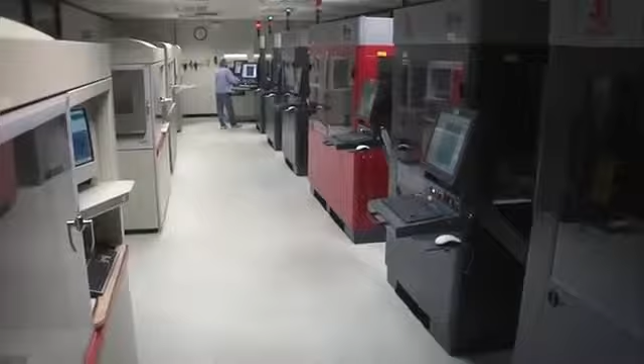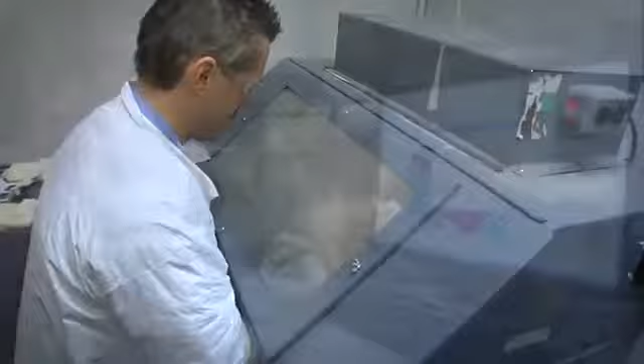This facility is operated by UAW 160 employees with some of the most competitive work rules in the corporation. These are very talented men and women, wood model makers, metal model makers, who basically operate these machines 24 hours a day, 7 days a week, 365 days a year.

These employees, these model makers, have taken their classic training and applied it to this new technology and come up with several innovations. In fact, some of the innovations that these men and women have created have become industry standards. Our technicians work so closely with 3D manufacturing people that it has helped them to modify their equipment or actually bring enhancements into the trades and in the industry.

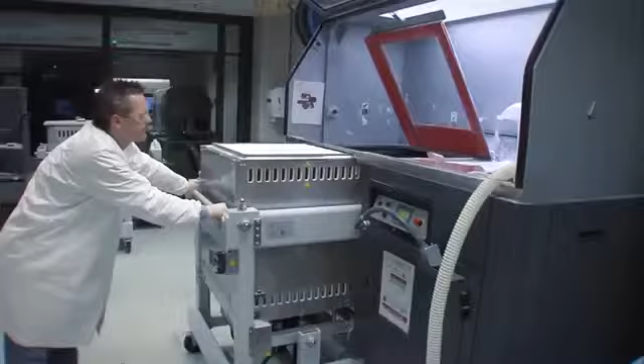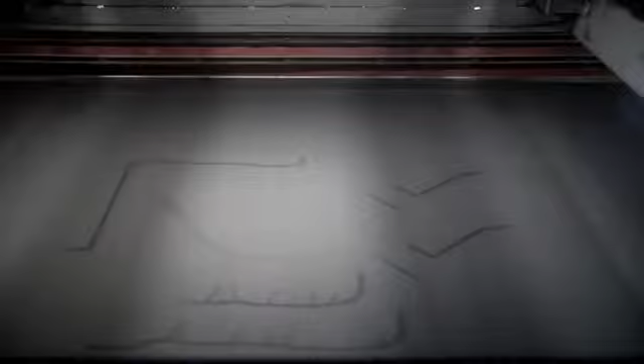Years ago, you would actually have to manually load those machines with this powder and mix those powders manually and then insert them. So they worked in conjunction with our folks to find automating ways of loading those machines. And then through looking to automate them, we also found out, well, what about recycling some of this older material? Instead of just using always virgin material, let's go ahead and mix a blend of reused material with new material. And they've actually developed a machine station that combines those in one.

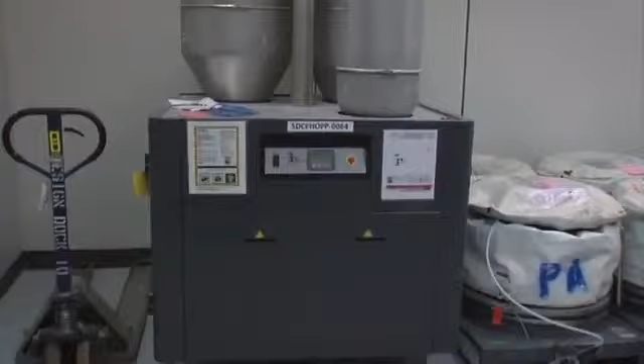To date, we calculate somewhere around 30% recycling benefit for us. And that again was with the collaboration of the local 160 skilled trades folks down here in this very lab. And they never stop amazing me on how they come up with better ways to do it.

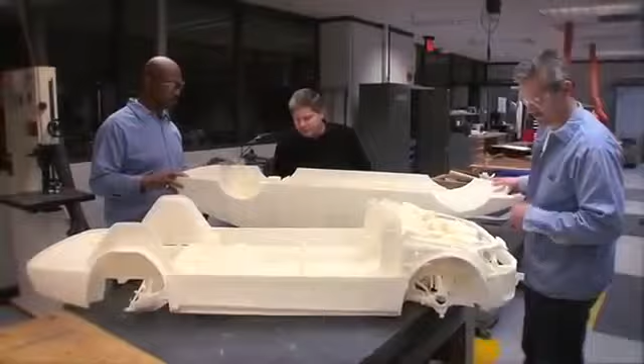I'm a wood model maker by trade. I've been in the RP lab for 15 years. The more I saw of it, I worked with it, and then I got into the department, and it just grew from there. It's unbelievable. And just seeing it advance, it's just great. I mean, things that we do now within a day or 2 days would take months to build by hand.

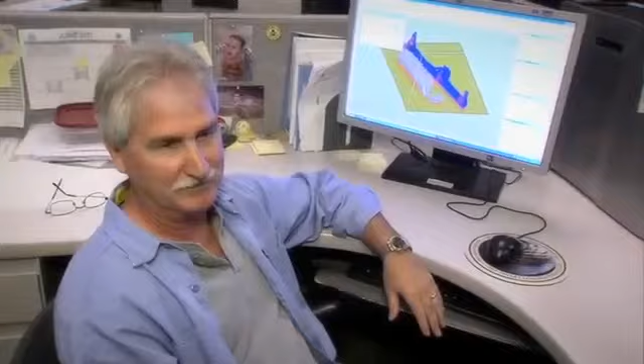We are really dedicated to what we're doing. That's the main thing. We all enjoy the work and we want to see a good product come out. And that's what our main goal is. And it's come a long way from when we started.

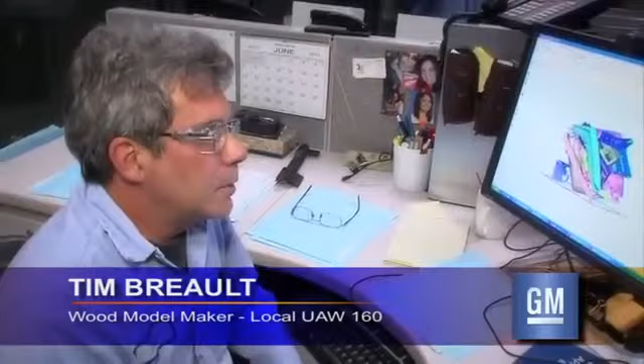I worked for GM for 27 years. I'm a wood model maker by trade. And I worked on the CNC machine prior to that, but it's just cutting up parts and manipulating parts, understanding how they work and function and whatnot.

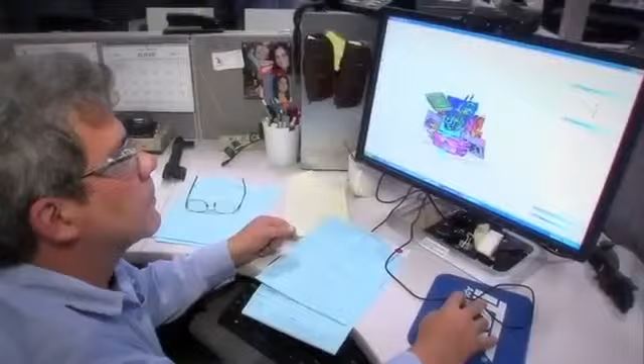So as the hot jobs come down, like this one here, I was able to quick cut it. I was able to put them on top of this show here, I call it a show. As you can see, these little windshield wipers, they needed them right away. So I was able to place them on top of a build. I never miss a beat and they just keep going.

Been a pleasure working here. We got a good group of people here. Enjoy it. So I got another 10 years or so.

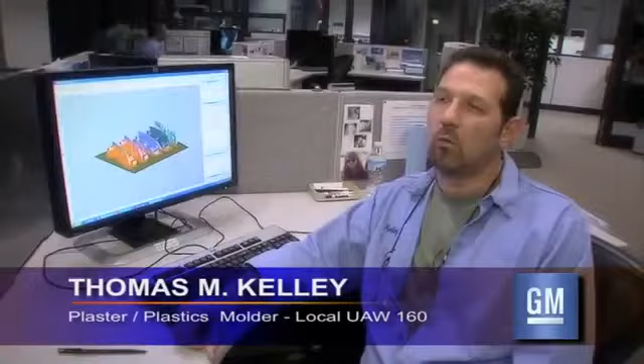I'm the newest person, one of the newest members here. I came in with 3 other people. Well, one of the appeals was because it was a small group. And also, I wanted to learn more about the computers and how to do these types of things. And I found it fascinating that you could take a laser and make a part out of it.

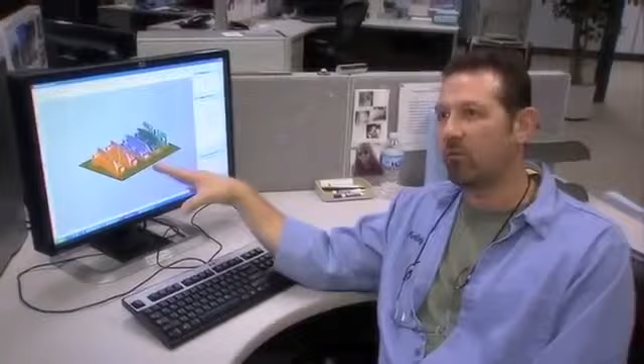Well, there's several ways that we use our creativity, you might say. And one of them is the setup of the jobs. We have to look at the part and see how this can fit on this platform in order for it to be made on the machine. You have to look at it different ways, so you have to have good spatial relationship skills. Pieces that won't fit on these platforms, we have to make them in several pieces sometimes in order for it to fit on the platform.

I asked my daughter, but she's really not interested in this stuff. But my son, he would definitely be interested. So with the right training, maybe one day he'll be able to get a job here.

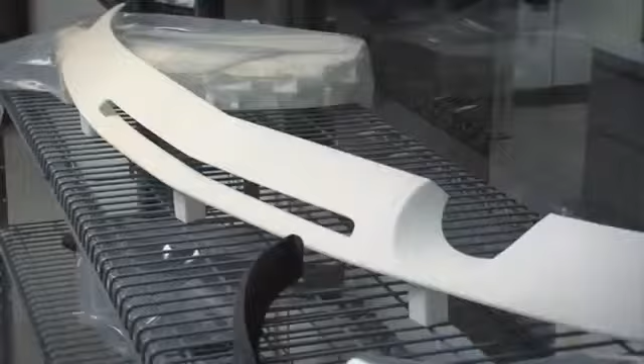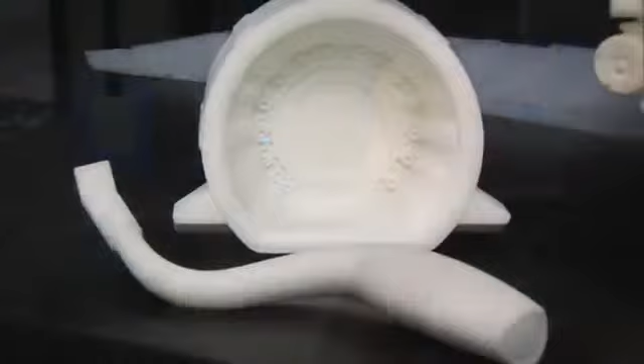We once upon a time used to be plan B, oh, I forgot to get this part in the system, let's go to RP and get it made, to where now we're plan A. Hey, let's go there first. Let's try to get it made there. Why spend the green dollars? Why make the tooling changes and the tooling costs up front when we can actually utilize the rapid prototyping lab right now?

I don't see any end in sight for the use of this technology or General Motors' use of this technology. It is a way to reduce product development time, saves costs, gives designers more options. As such, we've been able to continue to grow. I don't see that stopping anytime soon.